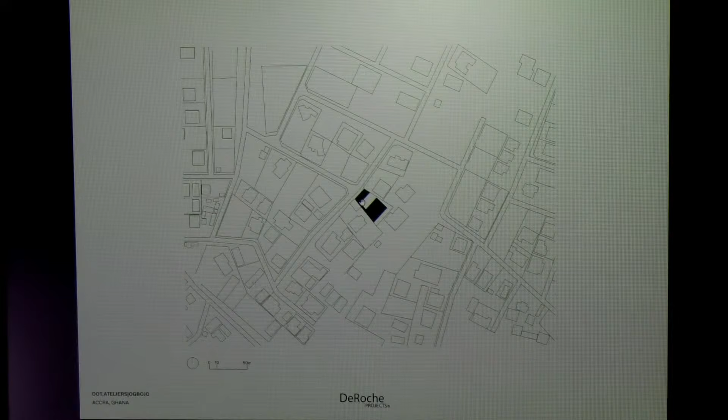The project can be seen or understood through these 6 moves, which is really just understanding and testing the existing structure, removing irreparable building elements and leaking building elements, which obviously compromise the use. And third, reprogramming the ground floor, first floors, as the program requires for 3, 1 writer and 2 curators at the same time to occupy the space.

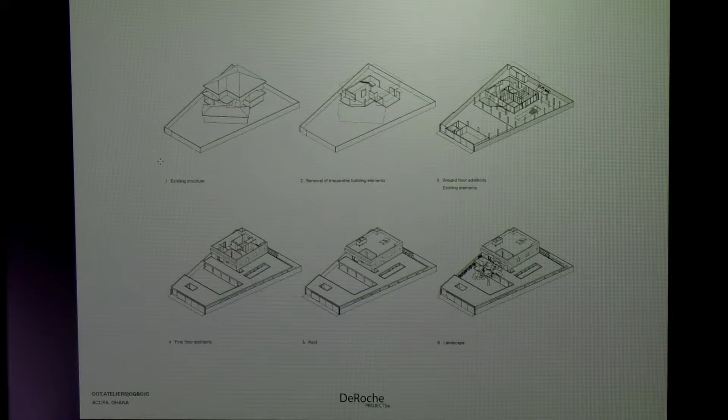We've then introduced new roofscapes throughout the project and then adorned the project with landscaping throughout. From the outside, the project is pretty nondescript. And that's intentional due to the matter of urban grazing, which also happens along the front of our road.

However, when you come to the inside of the project, from the entrance, you have this large courtyard, this green space, which ultimately frames the front elevation of that adaptive reuse structure, and it shows this canopy which lines all along the outside. You would notice that the concrete of this project has a very particular color, and that's the color of using the calcined clay cement that we use. And because we can get almost a match, through the data we've received, we've lowered our carbon emissions by using this by 37% in this project.

What you see is a canopy that's been inserted in and around the project. The canopy is treated as both a climate moderator, but also a privacy moderator. As you can see, the existing buildings in and around that we've come to inherit on this site built directly on our boundary. So in order for people to use some of the leisure spaces created like the pool or the courtyard, this canopy grows and shrinks accordingly to create privacy.

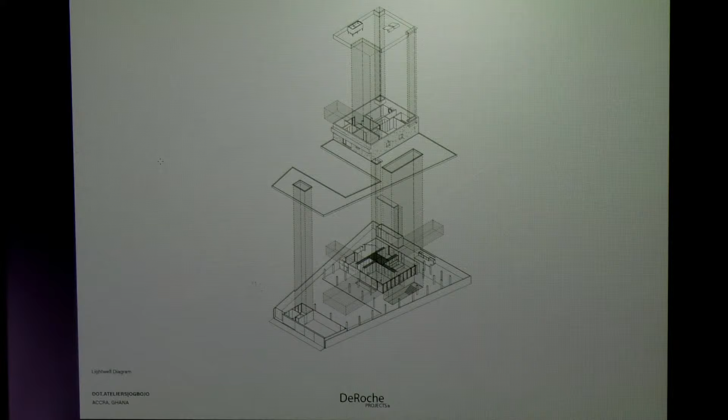Playing and framing light in this project is something that was very important to us. So this is a little axo or light well diagram. Again, a lot of our neighbors have been built directly on the boundary, but this is ultimately treated as a residency, a dwelling. We had to ensure that light, air, and all the other factors for suitable dwelling were maintained. So we had to look at bringing in light in different orientations and in indirect ways. There are obviously climate benefits to that, but primarily what we're looking at doing is doing that in order to manage the light qualities inside the space.

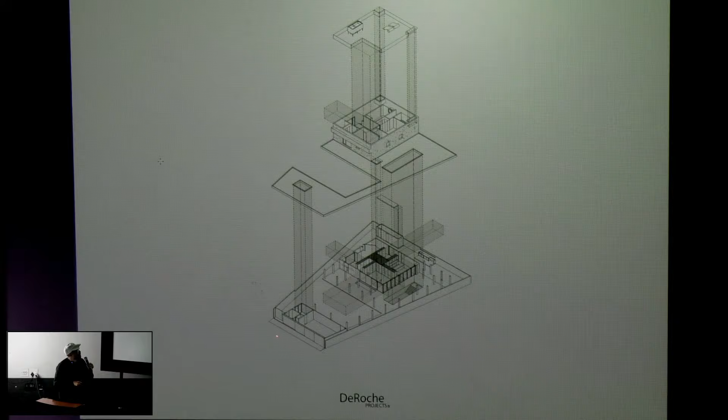So we've punctured the roofscapes in a number of different ways, horizontal views out to various gardens. For instance, this large window pane that looks directly out to the courtyard that's anchored by a mango tree. We actively play with light in a lot of our projects and use light as an active participant in the design and the realization of our projects.

Again, this is an adaptive reuse project, so we really like speaking to a dialogue where we make a connection between the existing structure and the proposed or the new structure. And in making that dialogue and not to confuse the two, what we try and do is leave the existing structure completely raw and exposed, and then borrow the language of these circular columns for the colonnade, which runs around and acts as the primary structural logic for this new extension.

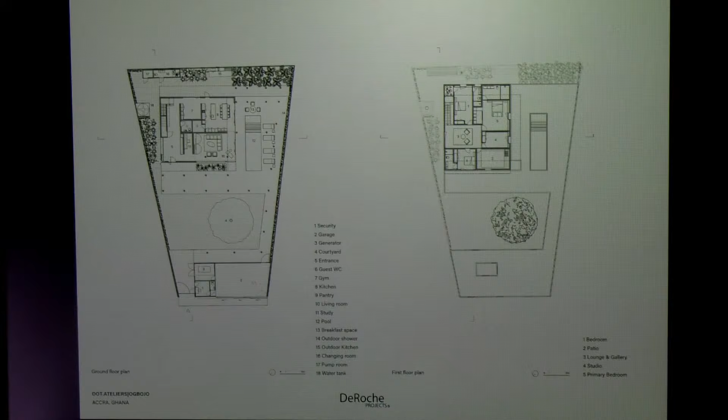In the plan, a lot of the public spaces are located on the ground floor for the residents of this residency. So you have your living room, kitchen, gym, writing room, all of these public functions on the ground floor. They open up to the pool, they open up to the gardens, using the exterior as an extension of these public functions. And on the upper level, we basically have all of the ensuite rooms for the 3 residents, along with a meditation room, which we'll see in some of the latter slides.

Again, bringing in that indirect light, just behind us is actually a building. So putting a window here in the facade as a measure of bringing in light would obviously also bring in a privacy invasion. So what we have are these solid walls with light coming in from above, which drops indirect light into the space, but also acts as a measure to mitigate heat gain within these interior spaces.

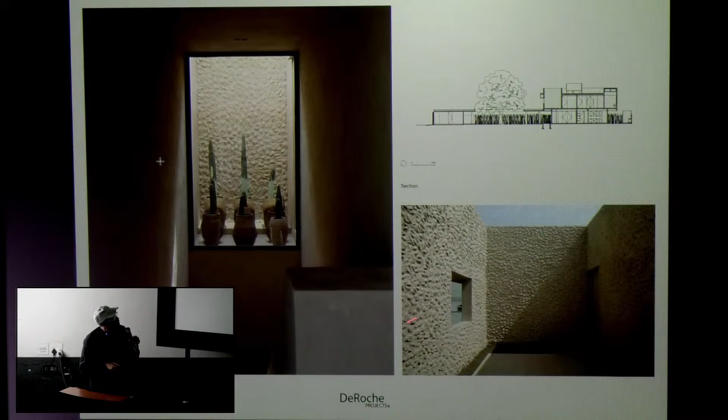We can also see here the courtyard space, which is on the upper level, treated as a meditation room for the residents. And you would see that in this, we have this kind of very textured facade.

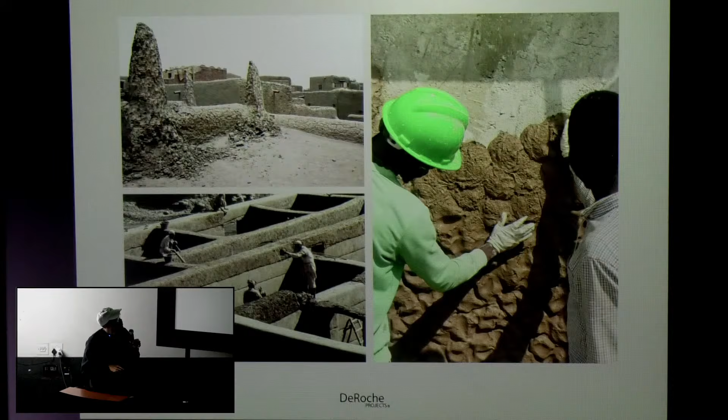And in looking at creating this smooth texture, what was more interesting to us was that starting process and working with these artisanal masons and making them very much a part of the collaboration of this project by artisanally sculpting this facade and treating it almost like a canvas by hand. And that's what lends itself to creating this dynamic facade, which is a sort of progress of building with earth.

The second project I'd like to share is the Surf Ghana project, which is located in a very rural part of Ghana, about 8 hours away from the capital city. To put it into context, it's very minimal with the resources that go to building structures in this area. So pretty much every building is a collage of different tiles. They're all block work and rendered and painted buildings, which often fall to decay quite quickly due to the strength of the breeze that we get directly off the Atlantic Ocean.

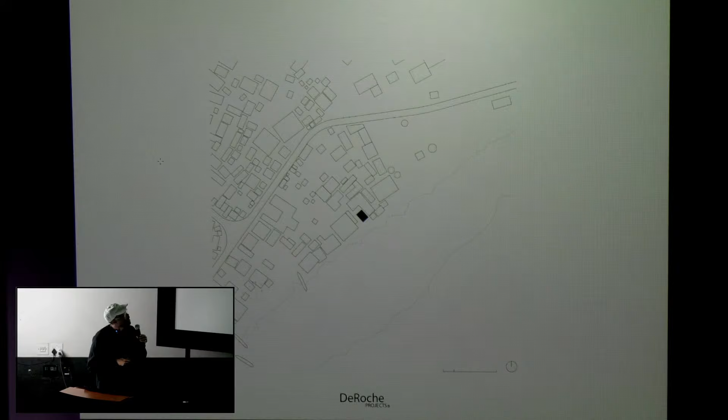Again, it's another site with a very small footprint and intervention, but a very important one for the community of Busua. As you can see, it sits directly on the Atlantic Ocean with a series of structures in various states surrounding us and wedging us in. You can see that structure again here. This is the project, with our neighboring buildings built very closely around us. And in some ways, we treated the two large ficus trees at the front of our site also as a constraint, so building within these four constraints around us.

Again, this is another adaptive reuse project. What we encountered was a single room that the surfers used to sleep in with a leaking roof and a toilet in the back. This was a garden at the back that, due to the necessity of needing a toilet, they closed out and filled with this raffia-lined toilet and dilapidated roof. We didn't have a big budget from the NGO, Surf Ghana, to do this project, so we completed the demolition and even some of the building with the community of surfers that were going to occupy the space.

Something that we found very interesting is that bringing in the occupants at the beginning of the project and making them a part of not just the design, but also the construction, lends itself to a certain level of stewardship and care for the building post-occupation. Even going back to the site now, it's quite beautiful to see how the surfers make sure that the space stays clean, pristine. We even get calls from them still when something breaks to have it replaced.

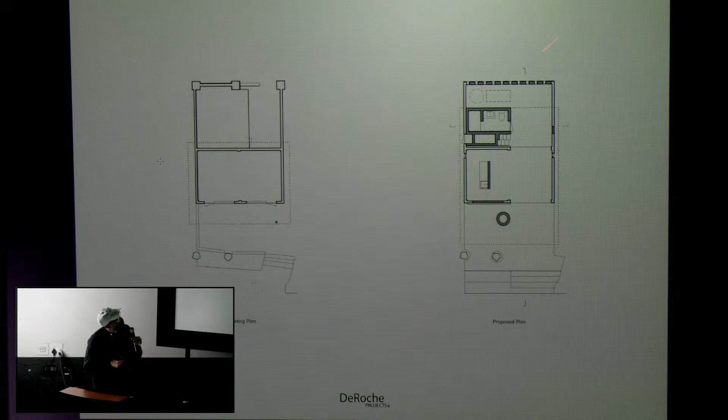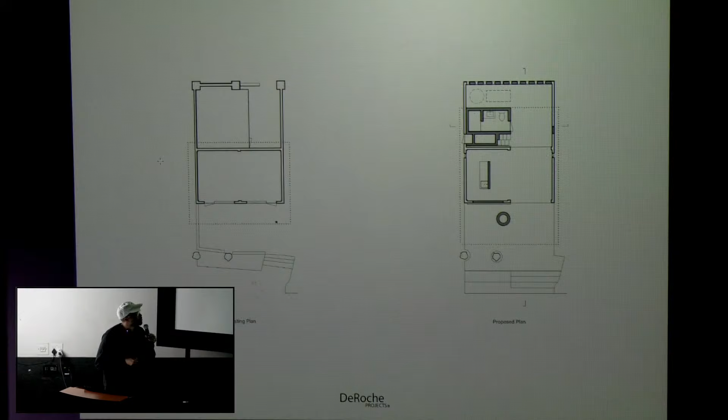As I said, it was a one-room structure that we inherited with this toilet at a rear garden. We kept that single one-room structure as it needed to be, as this is just a community hub for surfers. We kept the toilet towards the rear, except we put it in what we called an inhabited column. Everything you see in gray is structural, and it's anchored by this pillar at the top. We also perforated the back wall and opened up the facade, so that from the Atlantic Ocean we can get a strong crosswind breeze throughout the structure, because the project couldn't afford an AC, let alone even built-in fans.

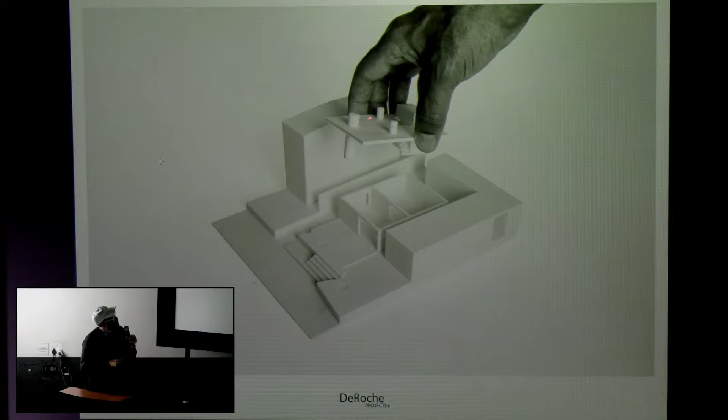What we deemed this element that we plugged into this existing structure was the plug-in. The plug-in is classified by this inhabited column at the rear, which serves as their toilet, this one structural column at the front, which creates this extended porch or covering to a porch at the front, which is now a really beautiful and dynamic community space, and a series of folly columns, which allowed us to connect hammocks and use the top of this additional real estate as a kind of leisure space for the community.

Again, simply breaking the project down into 4 moves, we looked at it as an adaptive reuse project where we removed the roof, inserted the plug-in, ensured that we had passive cooling throughout the project, so the sun hits this concrete platform, which buffers its direct heat from the space. We looked at using, again, this low carbon concrete and then creating this extended roofscape at the top, which allowed the community to activate and basically increase the footprint of the project.

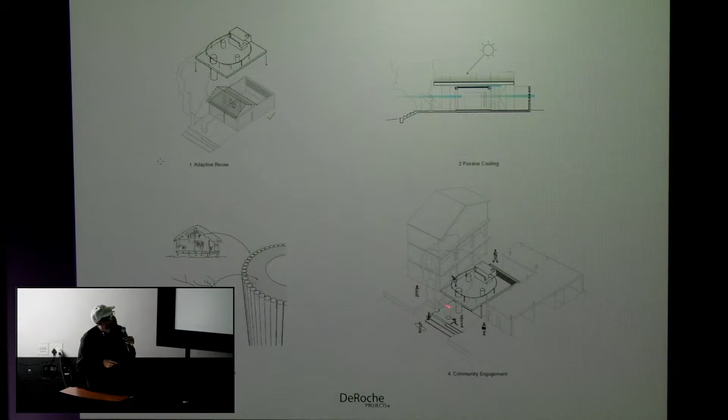So where we couldn't increase the footprint of the project to the left, back, or front, what we had to do was create this flat roof at the top in order to do that. So right now the community uses it for barbecues, stretching, observing the surf swells, etc. So it's quite beautiful. And we've been documenting how this is being used because it's actually a really beautiful post-occupation reality of the project.

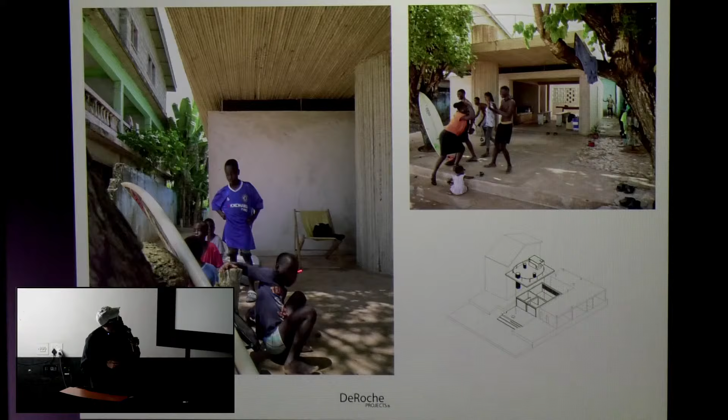Again, showing it from the beachfront, taking into consideration how to preserve these two ficus trees and not tearing them down for the sake of creating this front porch. Showing the community using this front porch space, both kids and adults that use it.

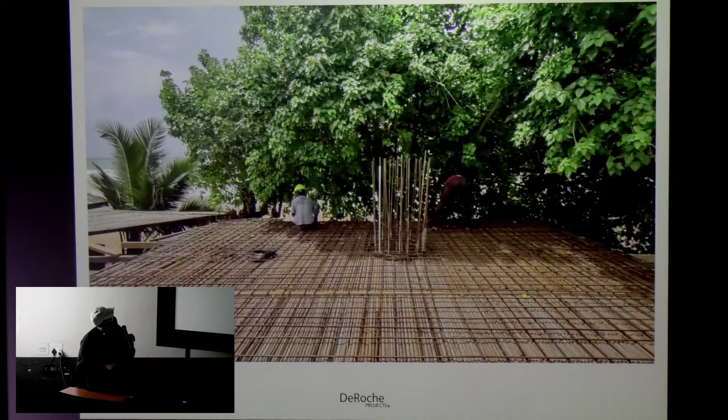But again, instead of mimicking the use of the raffia, we were rather inspired to use it as a kind of biodegradable formwork that we would make using very thin plywood that we can find in the community that's typically used for roofing sheets. So it's this reeding that ultimately gives us this fluted texture on the concrete surface and allowed us to create a formwork that would naturally degrade back into the ground.

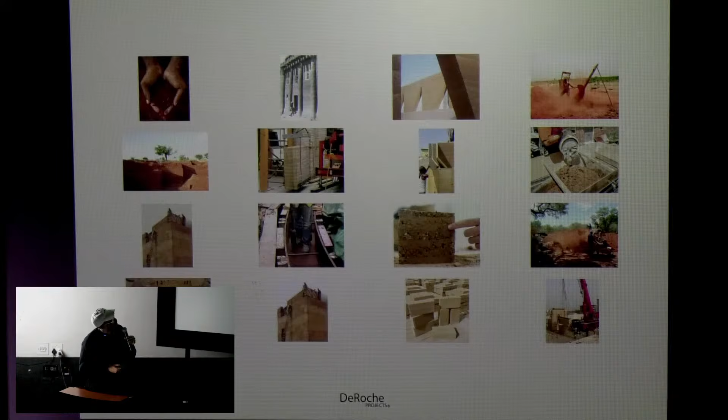And that takes us to the end of the 2 case studies using pozzolana, this low carbon concrete that we're utilizing in Ghana. The next 2 case studies that I'll take you through are using rammed earth. Rammed earth is a material that I've been obsessed with since graduate school, where I've traveled across much of North Africa and West Africa, surveying a series of adobe and earth structures. These are just a few images from that collection, but also a few inspirational images that serve their purpose in our studio and how we work with the material.

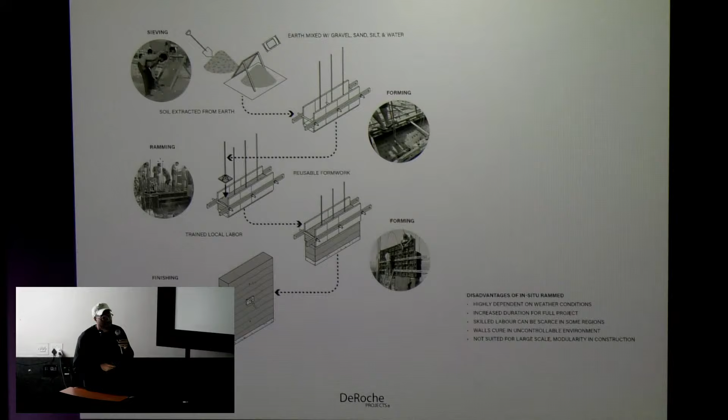However, this results in quite a bit of waste in formwork. Additionally, one of the disadvantages is that it's highly dependent on weather conditions, if any of you have ever built with the material. In Ghana, we face two very extreme rainy seasons, and in these rainy seasons, it makes working with this material practically impossible, further delaying the construction of any building that we propose, but also, and most importantly, hindering the commercial viability of using rammed earth in much larger developments.

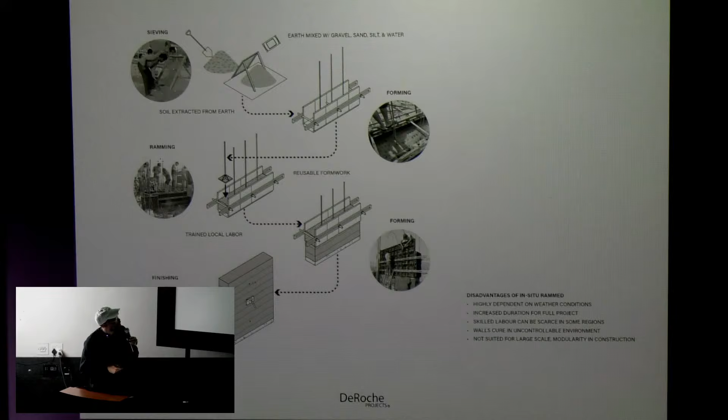Increased duration for the full project, as I just stated, skilled labor, you name it. Walls can cure in uncontrollable environments and are not suited for large scale modularity in construction. So we became very interested in what happens if we augment using rammed earth in situ and really think about it as a series of precast modules.

And we started researching this, and we just had to wait for the right project in order to put it into fruition. But in theory, the idea is that we can get earth from anywhere that has the right soil and clay content. We can transport that soil to any site or any controlled environment off-site of the project. We can build and design formwork that allows us to ram, create these prefabricated blocks, package the blocks for transportation,

lift them into place using cranes, either mobile cranes or spider cranes, patching any blemishes through transportation, inhabiting a structure, and if built with no cement, after its life cycle, bring it down and patch it back to where it belongs, or where the soil was taken, or any new site for that matter. So this is the kind of cyclical process of using rammed earth that we're absolutely fascinated with.

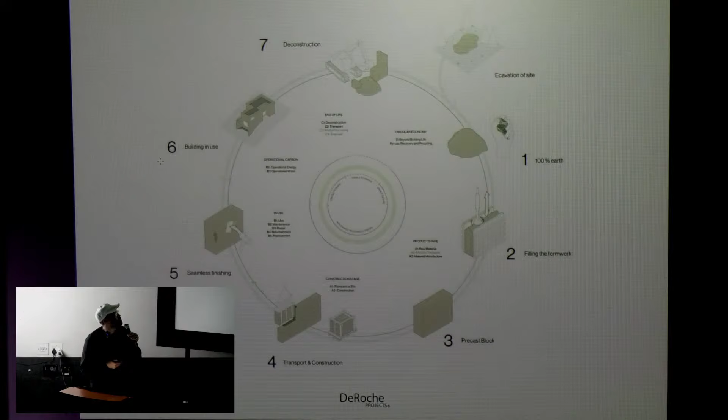We haven't gotten to using it without cement content yet. We're down to 3% cement in our rammed earth mixtures, but we are working on our first project where we're using lime instead of cement as our hardener in a beachfront property. And we're really hoping for positive results there, which are also prefabricated blocks.

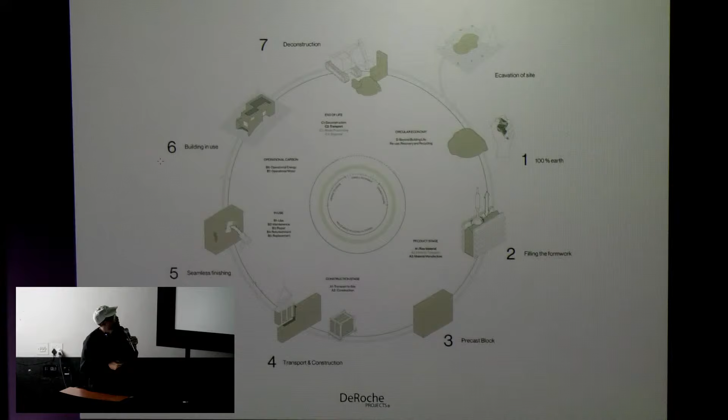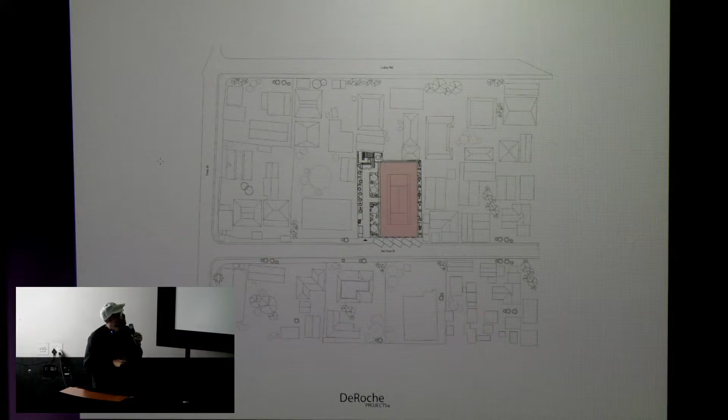The first case study that came about, maybe about a year or two after we started researching this, was the Backyard Tennis Club. And this project offered us the perfect opportunity to test our research into precasting rammed earth. The Backyard Tennis Club is a facility in the Osu neighborhood of Accra for children who are not privileged enough to visit private clubs for tennis training. So the owner of this club basically made this program to support the community and to look at making Ghana's first tennis academy.

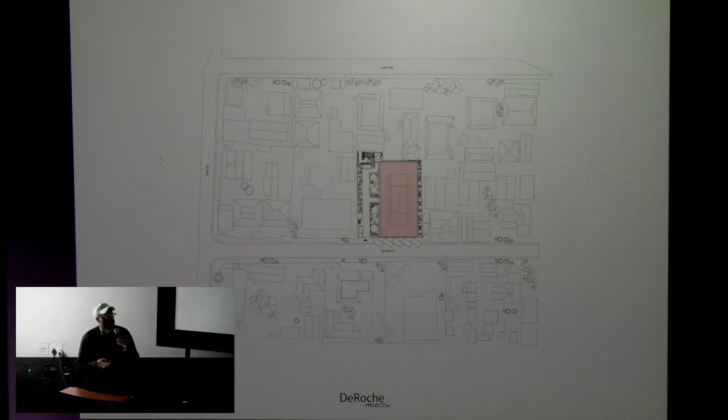Ghana is very short of public and open social spaces and civic spaces for public gathering. You can kind of see truth to that in this aerial view in Osu, which shows the tennis court here and this mass sprawl of pitched roofs and metal roofing throughout the city with very little open or green space.

In researching this tennis court, because it was the first time we were doing this, we came across a number of images in researching different surfaces for the tennis court and what's the most appropriate surface for it. We came across a number of images that just kept enclosing tennis courts in chain link fence. And that got us thinking about chain link fence as an enclosure entirely around public spaces that we make outside of Ghana and in other parts of the world. And where does this use of chain link fence come from, as it wasn't designed specifically for civic spaces?

Through research, what we found is that chain link fence was actually produced in 1844 as a post-industrial era way of cheaply deploying enclosures for cattle, to keep cattle enclosed in private properties and also keep intruders out. And somehow the industrial use of this material has now been applied to many of our public spaces. And in Ghana, we don't make chain link fence. So once we understood this and realized this challenge ahead of us, we had to really think about what we could do differently for our enclosure around this tennis court.

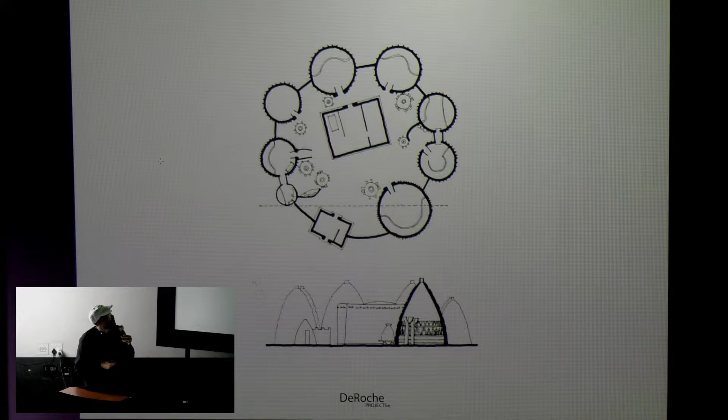And so this idea of protection around this enclosure became very interesting to us. Thinking of it as our tennis court in the middle, and then what is it to make an earthen enclosure around that tennis court, rejecting this idea of chain link fencing, which is this kind of generic model of enclosing civic and social spaces, and asking the question, what happens when we turn inward to material that we have locally and that represents the culture that we're building within.

We obviously didn't need this rammed earth enclosure to be as solid, as we're not really trying to keep predators out or keep something particularly in. So what we decided to do was look at, well, what happens if we have this rammed earth enclosure and we cut the 65-degree angle into that earth, which creates a level of porosity from the courts to the gardens and from the gardens to the courts.

In also being interested in this non-flat and dynamic facade, which is billowing in and around as it creates this enclosure, what happens if we play with geometry on what we call the sacrificial side of the court, which is on the outside? And what happens if we tilt that just 3.5 degrees and create these series of modules, which can be tessellated, modularized, and repeated? We can then precast this off-site, transport them to the tennis court, and then crane them into place.

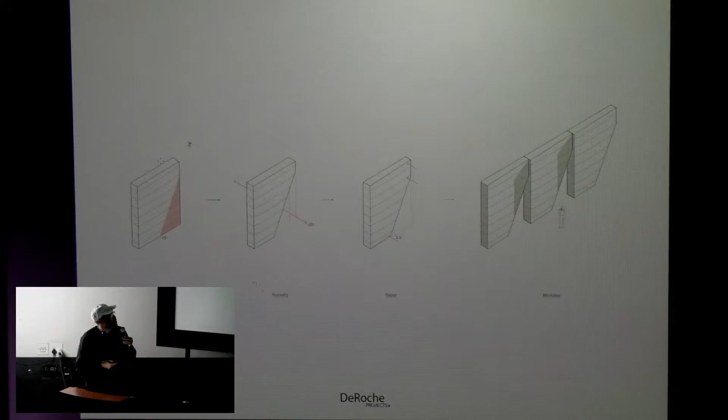And what this also does is it gives us a kind of dynamic play on light and shadow on the outside, but it creates the smooth, flat surface that we need within for the tennis balls and the tennis players that are training at this facility. What that does is it gives us this 33 rammed earth panel enclosure that sits around the tennis court and these 230 square meters of sustenance gardens on the outside.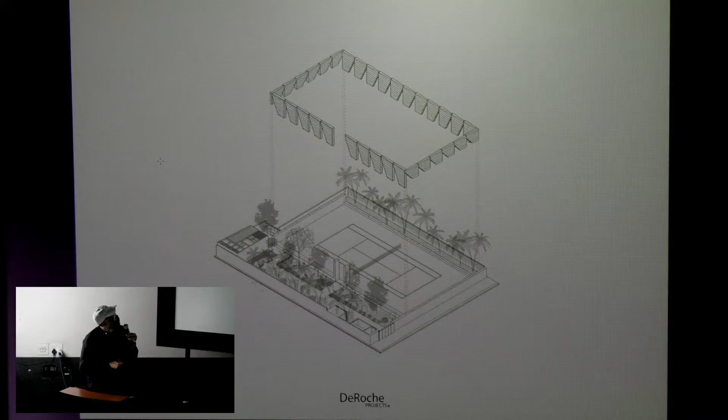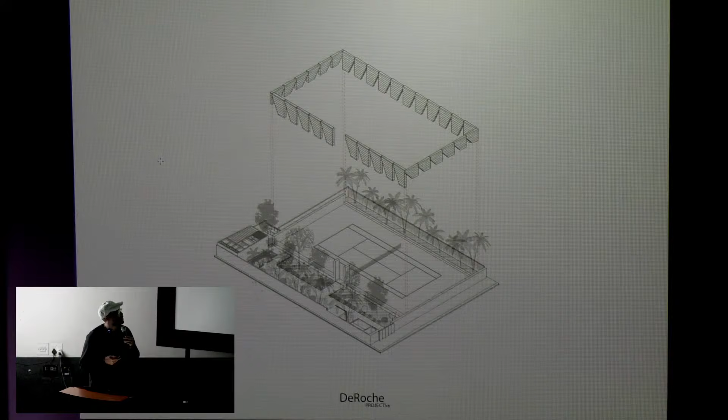The rammed earth panels measure 4 meters in height for the larger panels and 2 meters in height on the smaller panels. And they weigh 6 tons and 4 tons respectively. So very mammoth size panels that were produced off site. The 4-meter height that we got to is not an arbitrary number. It's actually thinking through the full life cycle and the logistics of moving these large panels in and around the city, 4 meters being the longest flatbed that we can get in Ghana to transport these materials.

What we can see here is this rammed earth enclosure around the tennis court, and how this porosity brings in elements of its urban context in and around our site. Glimpses of that garden sitting off onto the periphery here on the right-hand side.

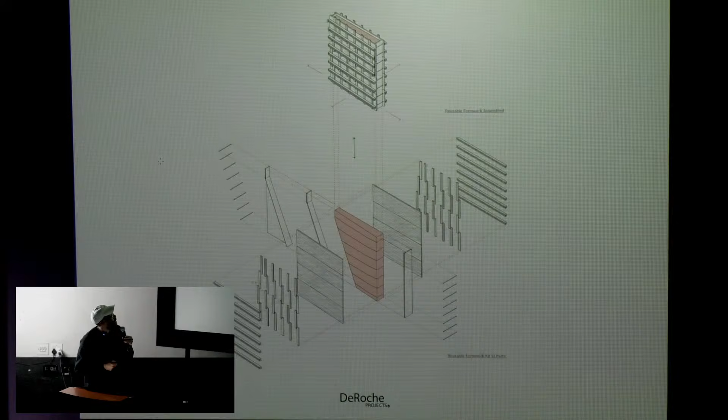These panels, again, thinking through the formwork that makes them and understanding that we were also quite cost conscious in this project, we had to design one formwork that was used for all 33 panels. So this formwork was basically assembled and disassembled 33 times in order to create each one of these panels. The way we designed this formwork was also to get the 2-meter height panel as well as the 4-meter height panel, respectively.

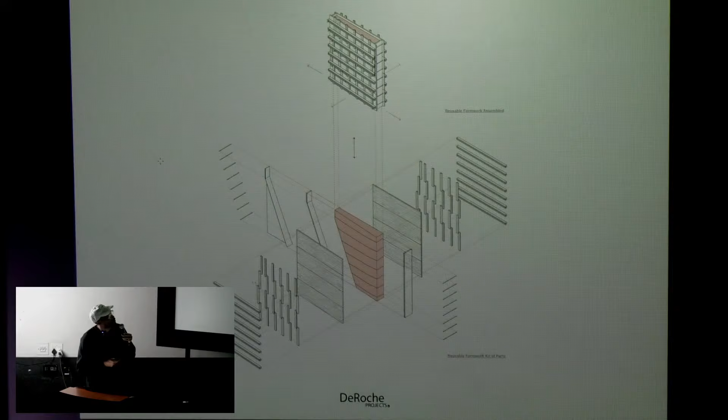And realizing that if we wanted really high quality, high precision earth panels that can withstand this commute from where we manufactured them to the site, we really had to invest in ingenious and well-made formwork, which is all made out of wawa board in Ghana, which is a locally procured timber that's lightweight, so that we can have the workers lift and transport these panels and disassemble them.

And in craning some of these in place, you'll see some of the panels were also fabricated on site, because in moving them into place, one thing we didn't take into consideration while designing for this entire ecosystem to create these prefabricated earth panels was the crane operator.

And that became the biggest disappointment in the entire project, because what we realized is that crane operators need to be very, very skilled in moving 10-ton items and how wind and restraint moves and angles these items into place. So what kept happening, and I don't have a good photo of it, and I regret not taking them because we were devastated when they would break. But we realized post it was actually part of the process.

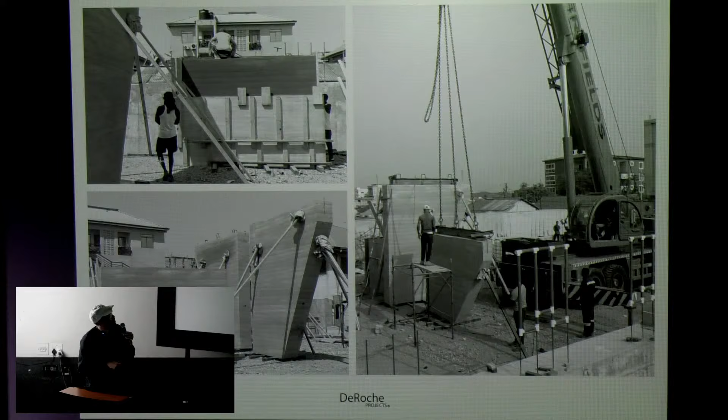We would be lifting these 4-meter panels into place, and he would be lowering it, wind would move it too quickly, and it would smash and break into another panel. So quite a learning experience here, but knowing that we were not done with this technology, we really took on board these crane operators and also sent them for training to better suit our next project, which is our next project that we'll share with you.

This is just showing you that porosity, so moving away from a solid rammed earth enclosure and really opening it up to the gardens on the side. Again, just for architectural purposes, the plan of the tennis courts is here. We have 230 square meters of sustenance gardens off to the sides. And then this tennis court is also supported by a series of ancillary structures, toilets, change rooms, storage, etc. for this facility.

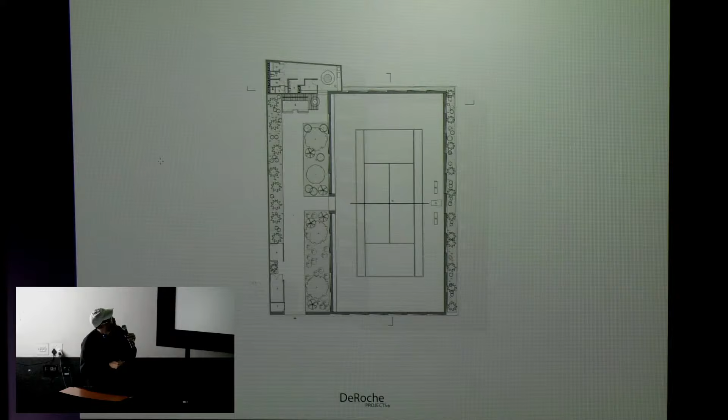We can see here, there's the warm-up path where kids can skip rope, run, jog, do jumping jacks, and train before coming in to actually hit. And in doing so, being flanked by these sustenance gardens where we have over 32 different species of planting on both sides, and including the periphery. It was really important for us because this was a change in how we see landscapes.

So this project was like a multi-point project for us, because this was the first time where we saw that perhaps moving away from landscapes which are ornamental, which we were doing in some of our previous projects, and turning to productive landscapes can actually be a far more interesting way of adorning our spaces and creating more active and live landscapes for the inhabitants.

And in this case, it was particularly special for the tennis players, because this garden was planted almost a year and a half ago, and it looks completely different now. And our first harvest of bananas, guava, hibiscus is growing, being dried, used for teas, mint, and the kids are harvesting these. So what's really beautiful is this idea of stewardship in the project from the kids and from the caretakers themselves.

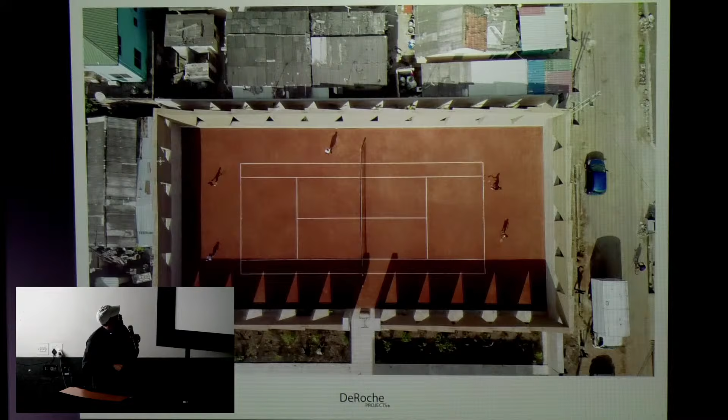Just showing you an aerial view of these 32 panels wedged very closely in and around this very dynamic and dense Osu neighborhood. And then the project from the streetscape before we did our intervention along the street, which was the last phase of this project.

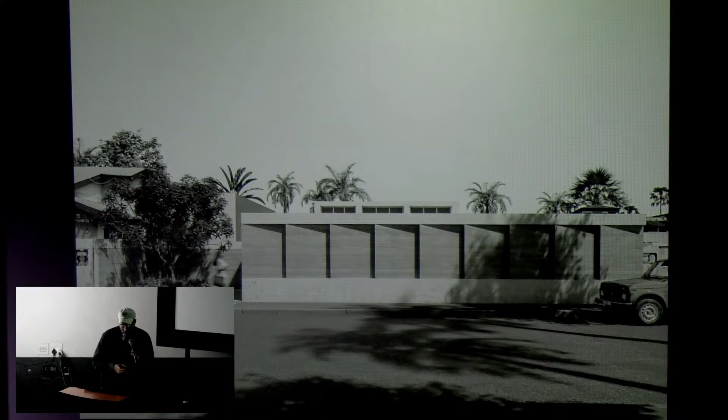A very nice 7-minute walk from this project comes the last project where we'll talk about rammed earth and its precast and this idea of a sustenance garden. And this project is very dear to me because this project is really less about architecture, and it's actually more about greenery, gardens, and what it means to make productive and formal gardens within a space where, again, as we said, we're challenged by open public spaces.

And the Backyard Urban Campus is a project where the owner of the tennis court and the owner of these gardens is ultimately buying vacant plots in and around the neighborhood to make this campus in this very dense inner part of Accra to really form Ghana's first tennis academy and West Africa's first tennis academy.

Subsequently, since making this diagram, we also received word that they've just taken over a sale of this building, which is abandoned on the left-hand side, to expand the number of tennis courts. We also have administration buildings that we're planning for, in an adaptive reuse building. And additionally, on a vacant site, a 5-story training facility for the tennis players outside of training on the court.

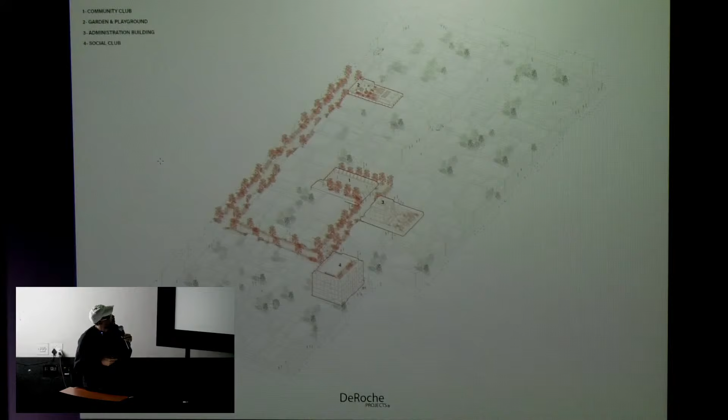But again, this is kind of just showing you how this all fits into this larger campus, but the project we'll be focusing on is this backyard playground and gardens. And I think, for anyone who's been to Accra, just to explain our city a little bit to you, Accra contains a variety of different and isolated public spaces, a variety of different parks and gardens that are very different for social, recreational, educational, and even environmental purposes, as with the Achimota forests.

However, these functions are often concentrated in particular spaces rather than deliberately being integrated into one holistic landscape. So you can go to the children's park and take your child, or even you as an adult, and go for play. However, there is no productive or educational quality to this park. You have the large forest in the heart of Accra, which is the Achimota Forest or Achimota Park, which is peppered with signs to keep off. While this is very good for the environment, there are very few planned leisure spaces or play spaces within here.

While we have the botanical gardens again, which is educational and explains a number of varieties of different native vegetation of Ghana, there is no active social space. And again, dotted in and around Accra, you have these agricultural fields, which actually became the essence of the project, as we became really fascinated with these grids and how these grids sit on the fringe of sometimes dense urban communities, but also sometimes these open and wild landscapes.

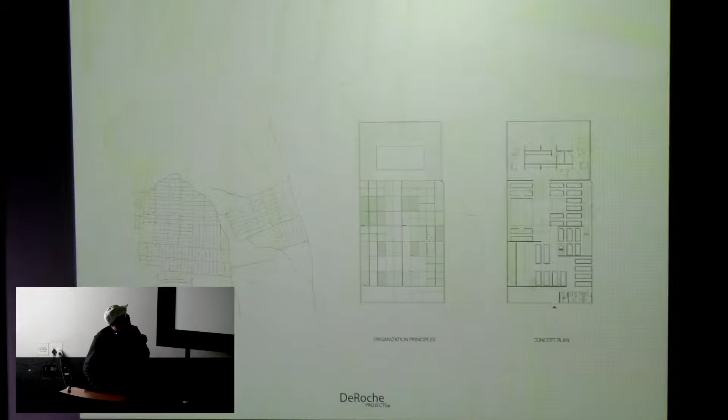So again, becoming really fascinated with these grids, we're really interested in studying how these productive landscapes and these agricultural fields can inform the garden project. And what does it mean to make a garden that encapsulates all of these different elements within a dense urban environment? So we were looking at this agricultural space planning, and what does this kind of patchwork of grids mean? How could it be applied to a tighter site?

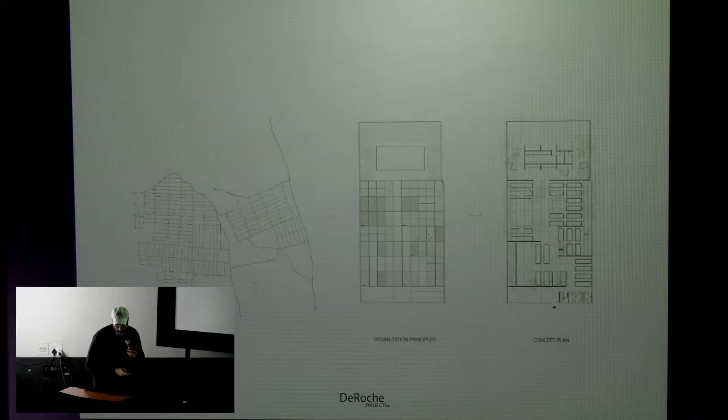And what do these organizational principles mean for organizing primary circulation, secondary circulation for caring for these different planting beds, creating pockets of different social activities, and then also organizing the planting beds of the various species of either crops or productive plantings that would happen within the site? And that led us to this concept plan where we had a cafe that makes use of everything that's grown on the site, along with pockets for play, education, contemplation, and leisure.

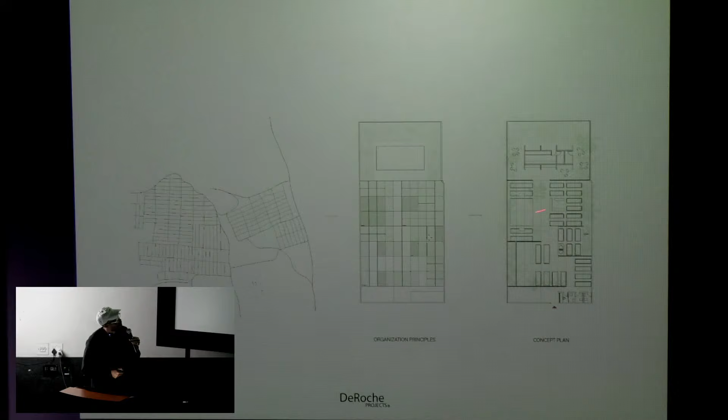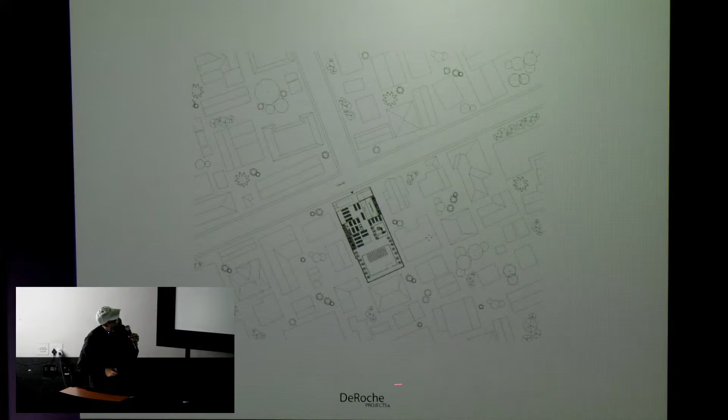That takes us to the site plan showing this active, educational and productive garden within this, again, dense urban environment, with the tennis court sitting just behind here, out of view. The plan is that we needed a series of ancillary structures to support the use of this as a garden. So a series of very practical and pragmatic things like toilets and storage and security, the boring things really, but necessities to making a park a usable space for this community.

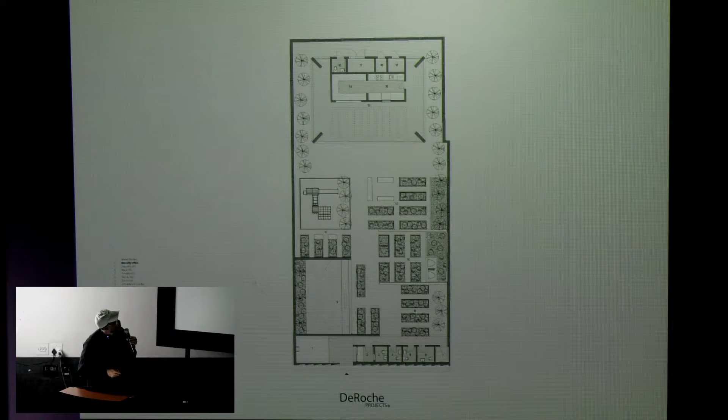A series of planting beds where you come in and you discover the contemplative gardens. You have the leisure gardens, forming all of here. You have the education gardens, the play gardens, and then this cafe at the back, which makes use of all of these productive planting beds within the project.

Just to illustrate and break down these different elements, you have the educative gardens, which are characterized by a series of planting beds with seasonal crops, with this U-shaped seating for kids, and a dedicated horticulturist on site tending to the greenery, but also educating kids and local school groups about the different plantings.

And I'll tell a funny story about how we actually got to this project. At the beginning of it, and why we thought education was really important for this, we were sitting down with our team and trying to understand what we do for making a garden, moving away from this idea of a vast green lawn.

And in doing so, there's this young lady, who I won't name as this is being live streamed, but she was having her breakfast, and every morning she ate this traditional Ghanaian breakfast meal, which is an egg with onions inside. And we were having this conversation about what it means to make these landscapes, and making jokes about this egg she eats every morning with onions. And she joked that by the time she's finished eating these eggs, she'll be hanging from a tree. And so we had to ask, do you think onions grow on trees?

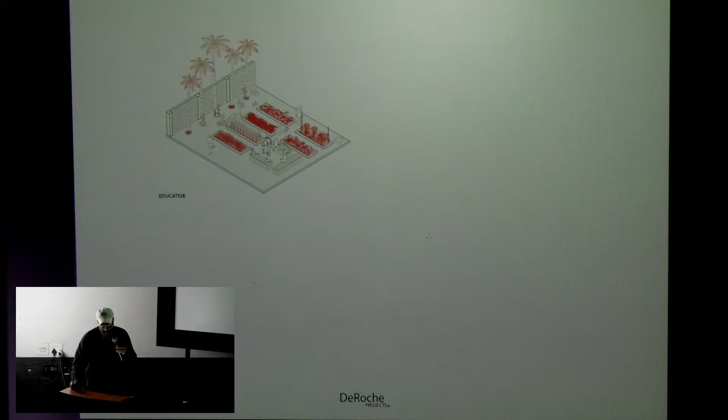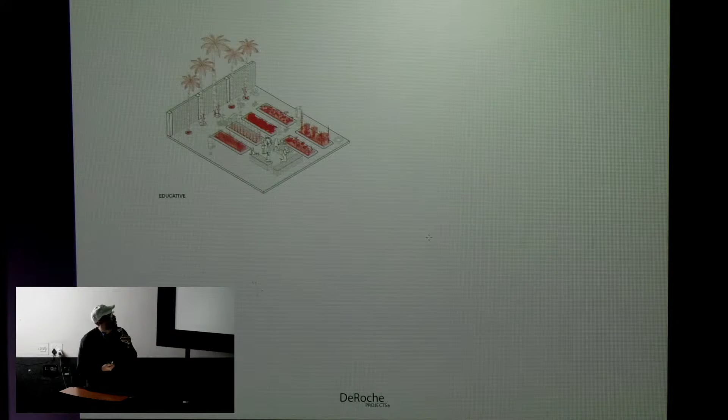And to which she answered yes. And so we were shocked by this answer. And she's much younger, in her early 20s. And we thought, let's use this garden for an educational purpose, to really educate kids who really lose sight of where things are grown and how they're grown, where they come from. And we thought that that was a really important element to bring in.

Contemplation as well was really important, to create spaces where one can retreat from this very bustling, dynamic neighborhood. And creating the only space where we have a lawn in the project. And this lawn is really meant to be a space where one can lay down and just kind of engulf this water feature, being shaded also, because as our sun direction comes from here, it also acts as shading. So one can really lay down in this field and divorce themselves from the everyday life for just a moment.

We have leisure, which is characterized by a series of in situ elements built into the boundary walls for social gathering. Also exploring traditional ways of play within the ground. It's to be said that the ground of this entire surface, which you'll see through some of the visuals, is all palm kernel shells. We've moved away from having large, vast green fields as the lawns for these projects.

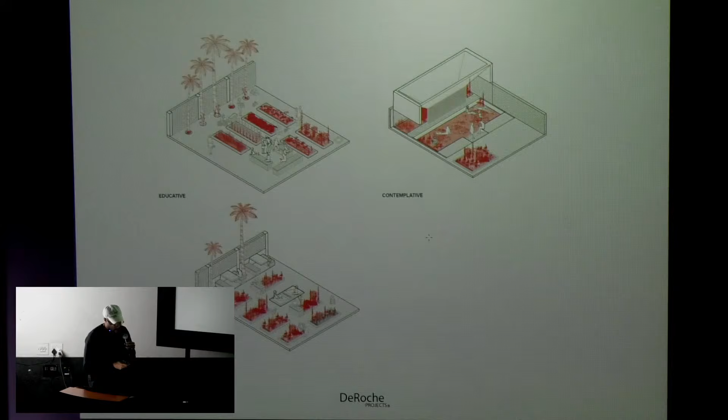And if anyone is aware of the game Owari, Owari is currently played in these wooden boxes with these shells and these carved holes. But traditionally, Owari is actually played in the floor and carved out of the ground. So we wanted to really explore these traditional ways of play and leisure within these gardens and really bring them back to the forefront of our contemporary society.

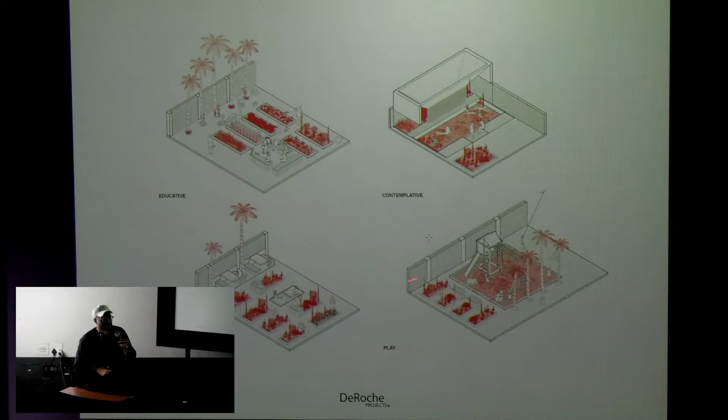And lastly, working on play as a dedicated element, where we're working with a Nigerian industrial designer on combining different forms of West African play into this multi-playscape, moving away from the inherited ones that we typically see, which is a slide, maybe some crossbars, a swing, a tire swing and things like that. So we were less intrigued by importing one of these playscapes, and more by what it would be to create one from scratch that really referenced and paid homage to traditional West African play.

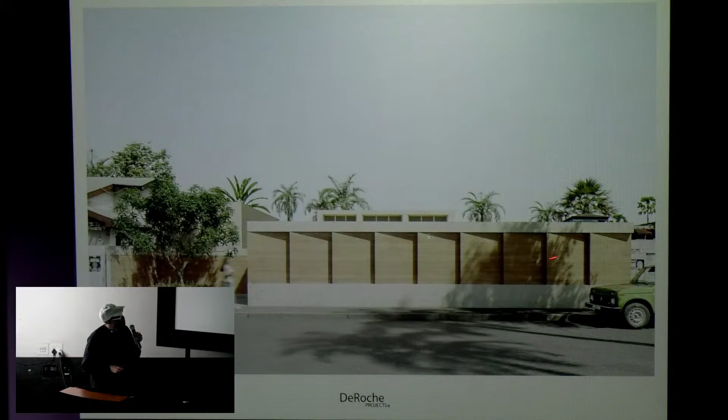Again, just as this is an architecture lecture, we'll talk about architecture. The panels at the front, again, are these rammed earth panels, significantly smaller in size, just given the programmatic requirements of the project. And I think it's a nice way to end the lecture, because it also uses this pozzolana concrete as a base to keep the rammed earth, for technical reasons, off of the ground for erosion purposes.

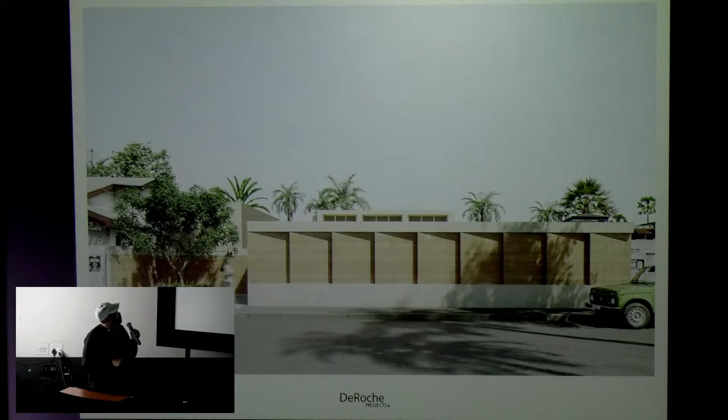And while these ancillary structures grace the perimeter, the boundary between the streetscape or the public domain and these private gardens, what we wanted to do was really find a way to bring the notion of the gardens to the foreground. So we made this forecourt, which allows us to bring some of this productive planting to the front of the project, avoiding the necessity for signage. And actually what you can see is a very porous entrance, which would lead one naturally into the interiors to face this contemplative garden.

This contemplative garden, again, is characterized by this overhanging canopy, which during the rainy season allows us to collect water into a dedicated trough, which is then channeled into an underground water tank, which is used to irrigate the landscapes during the dry season.

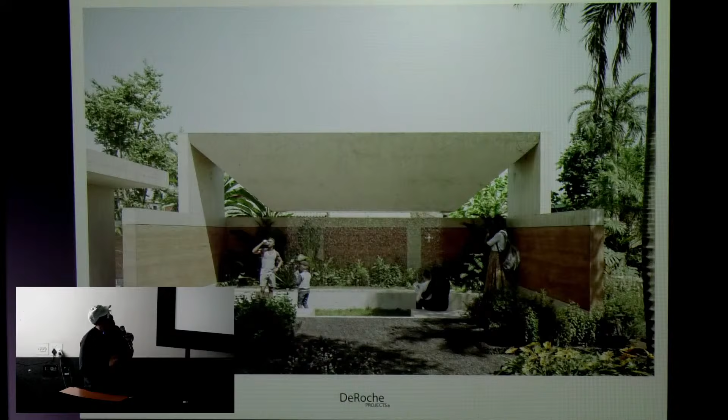Otherwise, it's home to just a natural cyclical water feature, which allows one to divorce and kind of drown out the sound of this loud street in front of us, Loco Road, which is always bustling with taxi horns and food stalls and bars and loud music. So by using the sound of water, we can actually drown that out and disconnect one momentarily from the city as a contemplative garden.

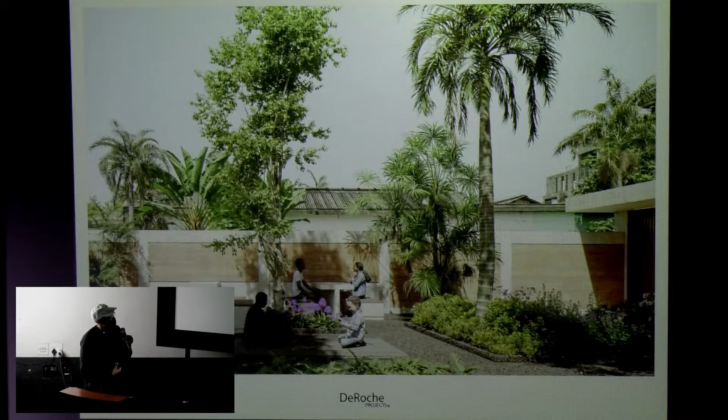We have these leisure gardens again, where this built-in furniture is all along the periphery wall, this game of Owari carved into the ground. And again, you can see in this project where we dismiss the notion of using a large green carpet field as a field for the landscape, but rather turn to this waste valorization of using palm kernel shells as the base. And what that does is it allows us to also create a very permeable surface for this landscape, where we have French drains underneath that collect this groundwater and again channel it into these underground tanks for irrigation.

So we rely less and less on the municipal water supply to this area, which only comes 2 times a week. So these sustainable strategies were also very important to us in this project.

We then get to the rear of the site where we have this cafe pavilion at the rear with this large porch, which allows people to gather, use it for Wi-Fi, work, congregate, and use leisurely. We can see here in the foreground this educative garden where we would grow seasonal crops and have this dedicated horticulturist educating children on different types of productive landscapes, along with this indicative and not designed by the industrial designer playscape in this play area.

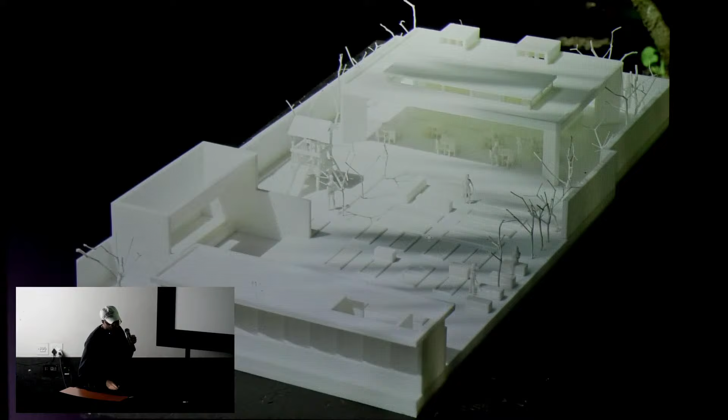And it's only in this area where we change the flooring material, as the palm kernel shells, if a child falls, can perhaps bruise them. So looking for something that's a little bit softer for the kids that would occupy this playscape and this garden space. And ultimately a concept model for this project that we built to kind of study it.

And just bringing us to the end, I just wanted to end with a quote by Stuart Hall again in the same passage, which says, "People have to have a language to speak about where they are and what other possible futures are available to them. And for us, Future Lineages is part of building that language." Thank you.